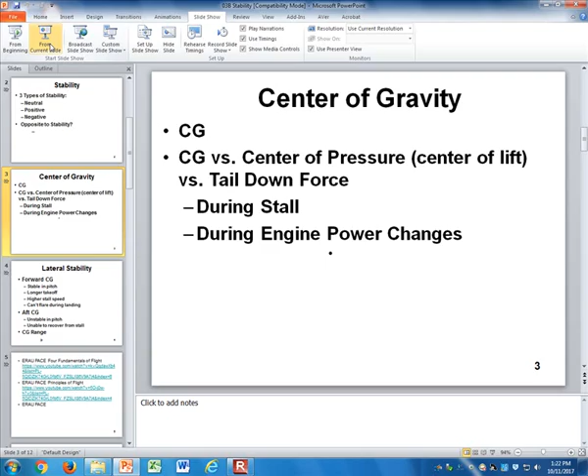So here we are. It's October, what are we now, October 11th?

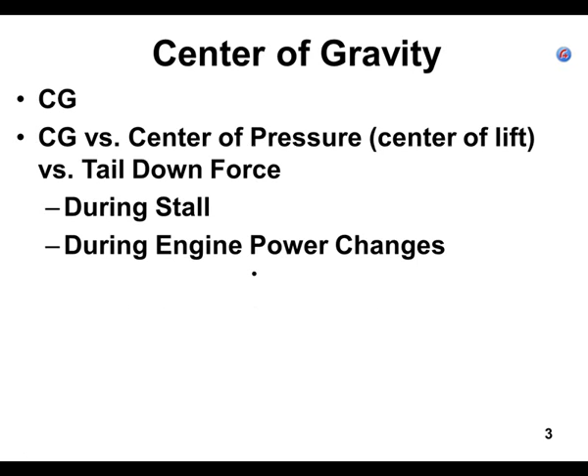We're in section 03B, stability. The last slide we were looking at was this one right here, where we talked about center of gravity versus center of pressure versus tail down force during engine power changes. Now I'm going to talk about lateral stability.

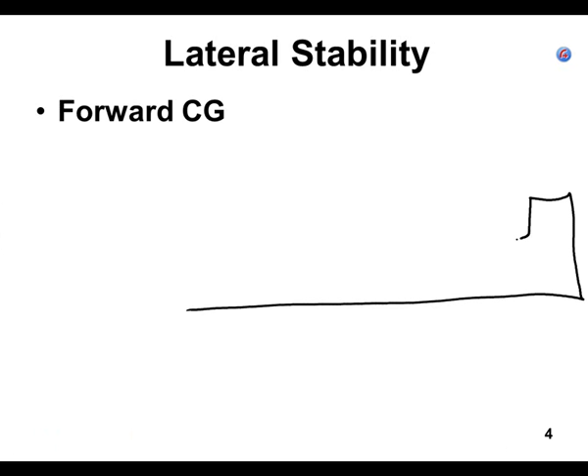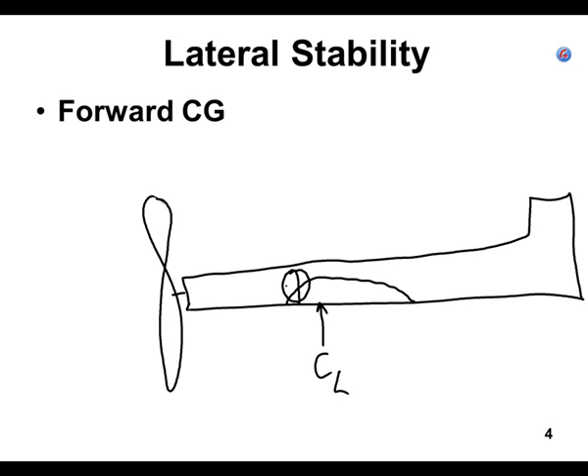What if you have a center of gravity that's way forward? For fun, let's ask what that means. Here's our airplane, and let's put our airfoil on it. Here's our center of lift, which is the same as the center of pressure, and just in front of that is our center of gravity. So there's our CG. The question is, what if the center of gravity is farther forward than normal?

I brought my questions today, so think about this problem. You're flying along at a certain altitude above ground level. In the central San Joaquin Valley, you're probably at about 20 feet MSL on the altimeter. You have it trimmed for straight and level flight.

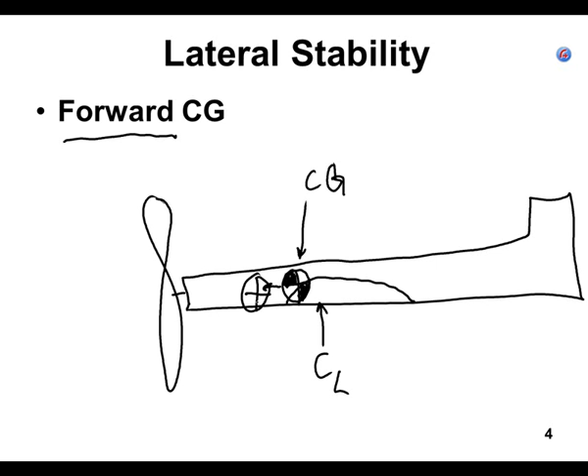All right, so you pick up your 20-pound boom box, lift it up, and sit it on the instrument panel in front of you, turn it on and turn up the radio. You moved the center of gravity of this airplane farther forward compared to where it was. I could have said you got in the back of the baggage compartment behind the seat and grabbed a 20-pound lead weight and stuck it up on the instrument panel. In either case, the average weight of the airplane moved forward from where it was. So in this case, we're essentially saying that we moved the center of gravity over to here, because if here's the cabin and here's this 20-pound boom box, we moved the boom box over to here. So our center of gravity moved forward, or shifted forward.

So now the airplane has a center of gravity. Remember, the condition of the airplane, it was trimmed. We were eating our ham sandwich, so we take a bite and we're chewing on it. We grab our boom box, stick it out in front of us, and turn it on.

We start rocking out. Well, actually, I'm thinking Kool and the Gang would be pretty awesome. Does anybody know who Kool and the Gang is? This is before they turned the phrase hip hop. It was like rhythm and blues, maybe kind of disco-y. All right, you don't know who Kool and the Gang is. Fine, see if I care.

So if you move the center of gravity forward and you don't touch any of the controls because you're all trimmed out, think about it. Don't say it out loud until I call your name. What's going to happen to the pitch of the airplane? You get three choices: the pitch stays the same, the nose pitches down a little tiny bit, or the nose pitches up a little tiny bit. It's down, that's right. So what do you think happened to the airspeed, Mauricio, if the nose pitches down and you don't touch anything?

You've got three choices: it'll go faster, it'll go slower, or it'll stay the same. How about you, Jordan? What do you think is going to happen to the airspeed? Yeah, the airspeed's going to increase.

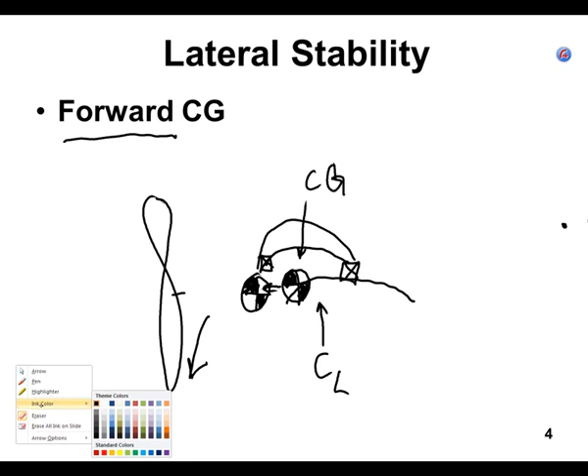Let's see if I can fix it. There we go, a little shorter airplane. So here's our elevator at the top of the airplane, at the top of the tail. And then we have this elevator.

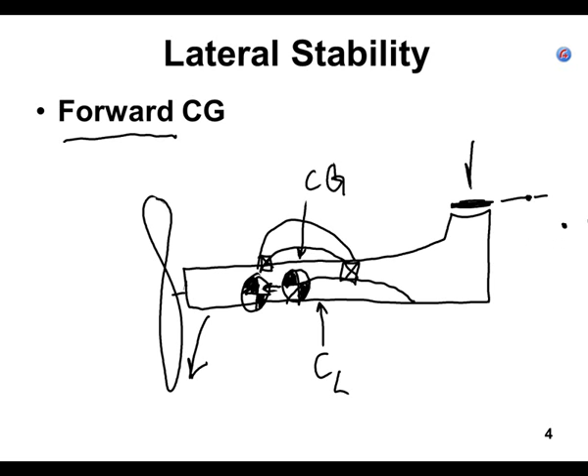But on the elevator is also the trim tab. So here is the horizontal stabilizer, which I'll call the horizontal stab. And then here is, and it pivots, here is the elevator. And then here is the trim tab.

We've looked at them before, and maybe that's what we'll do the last 2 minutes of class, go out and look at a trim tab. But when you move that trim wheel in the airplane, or in your case, the simulator, all you're doing is moving the trim tab to push the elevator to where you want.

So in this case, if the nose went forward, you would want the elevator to go up a little bit. So you would actually move the trim to go down like that, so that the air would hit the trim tab and push the elevator up. So yay, that worked out great.

What if you secretly stowed a human being in the back that weighed 100 pounds and you tried to put that on top of the instrument panel? It would push the nose down even more. Well, here comes the fun part. What happens when you go far forward that you run out of trim, and now you're even pulling on the control wheel, and even though you pull it all the way back, it's still going down?

Well, how much fun is this going to be when you're trying to land? It's fun as you're going towards the airport. Pull the airplane off, and you need to pull the nose up a little bit and flare, so you're going to be a little bit unhappy.

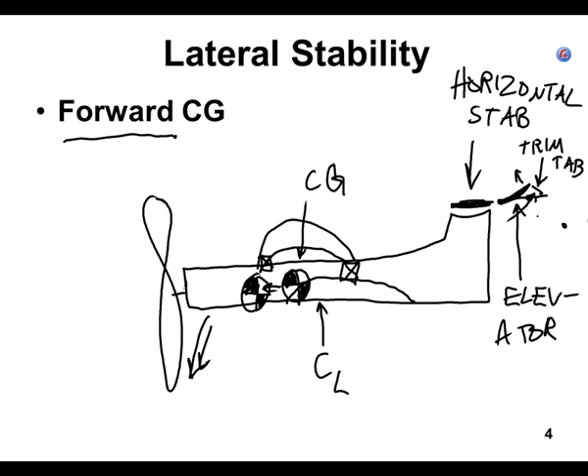So one of the biggest things about having a center of gravity that's too far forward is that you're not going to be happy when you come in and land. The three minor things about having a forward CG is that, one, it makes it stable. The airplane won't change the pitching up and down as easily compared to if the center of gravity was aft. So the airplane's a little more stable, and it'll hold altitude a little bit easier while you're eating your ham sandwich.

However, it will take a little bit longer takeoff roll, and the airplane will stall at a slightly higher speed, but 2, 3, 4 knots, you're probably not going to notice that. If your airplane will get off the ground in 800 feet and you have a 3,000 foot long runway, that extra 800 to 1,000 feet, you're not even going to notice that either, or that it's more stable in pitch.

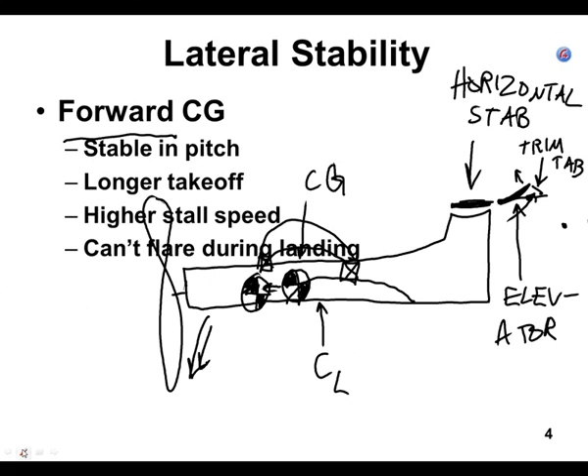Well, the thing is, though, and this is the important one, is that if your forward CG is too far forward, then you won't be able to flare the airplane during landing. You might be able to level it off, but what happens to the effectiveness of the elevator when you're flying slower and slower and you're coming into land?

Instead of doing 90 knots, you're doing 70 knots. You put all the flaps in, and now you're actually landing, and the airplane slows down to 60 knots. What happens to how well that elevator works?

Alex isn't here. Jordan, man, it's your day again. That's awesome.

If there's less air blowing across the elevator, does it work? If you normally expect the elevator to make the nose go up, but now you're flying slower, does it still work the same way?

It doesn't. That's correct. So when you're coming in to land, if you end up pulling the control wheel all the way back, you might just end up plowing straight into the runway and damaging the airplane. So that's why we don't like a center of gravity that's too far forward. Of all these things, this is definitely the most important problem with having a forward CG if it gets too far forward.

All right, so now let's talk about an aft CG. Aft is like the CG moving to the back of the airplane. Forward is in the front, and aft means it moves towards the back. Has anybody ever sailed on a ship? Is the back the aft, or is that the stern? All right, let's not worry about it too much.

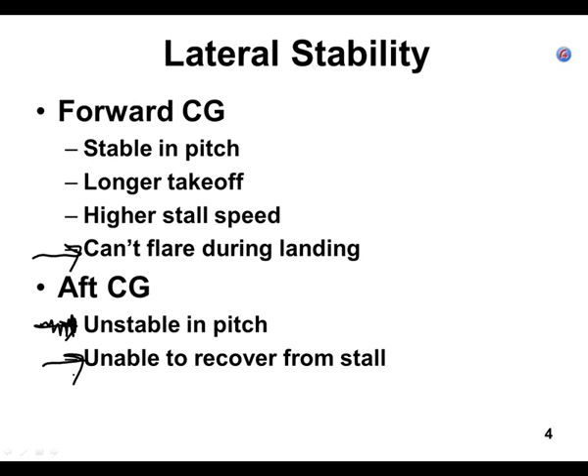So an aft CG, to me, this is my personal opinion, is worse than a forward CG, because a little bit of instability in pitch means I'm going to have to, when I'm eating my ham sandwich, keep one hand on the control wheel to push it and pull it, because it's less stable in pitch. But what I'm really going to be unhappy about is if the nose goes up too high. If I can't push it back down, I'm going to stall and I might die. So this is the most important one here - the aft CG is by far the most important problem if the center of gravity is too far back.

So literally what's going to happen - thank goodness we're pilots, and we like to add, subtract, multiply, and divide if we have a calculator in front of us. But other than that, here's our center of pressure at 1/3 past the leading edge. And we'll just say that this is where the center of gravity is most of the time. But we need to be able to put at least 2 or 3 boom boxes back there, right? Don't we want to be able to do that?

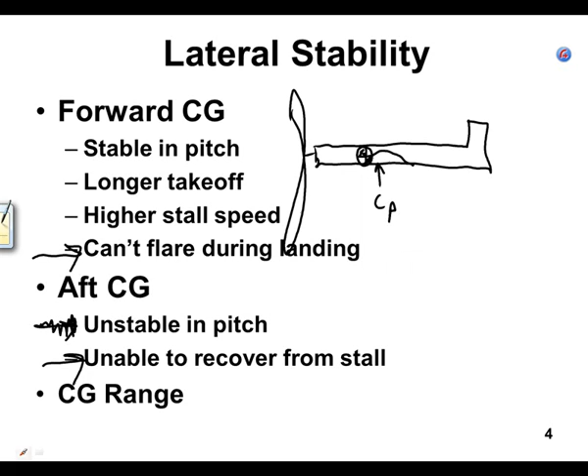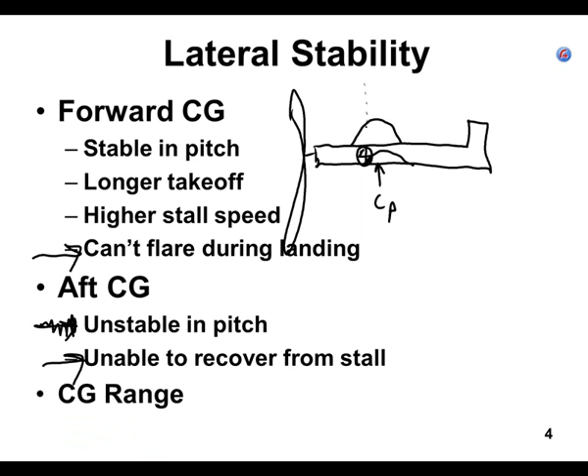Now, granted, we're probably not going to put them up front by the dashboard very often, but it would be really nice - say here's our bubble that we're sitting in. It'd be nice if this is where the center of gravity normally is, it'd be kind of nice if the center of gravity could be a little bit aft of that, and it'd be kind of nice if the center of gravity could be a little farther forward of that. Why is that doing that? Okay, so effectively, what that means is this area right in here is going to be the CG range.

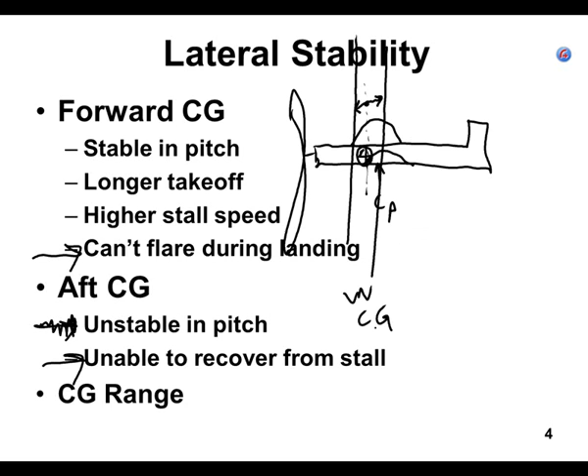Maybe a better way to say it is allowable. For every airplane, there's a center of gravity range you can load the airplane towards, so it's a little bit nose heavy, and the flight controls will still work well enough. You'll still be able to flare the airplane and do everything you need to. You could also load the airplane with an aft center of gravity so the tail is a little bit heavy.

But you're still going to be able to push forward on the control wheel and make the airplane go down in case you have a stall or whatever maneuver you need to do. The good news is there are engineers that figure this out in advance, and somebody at the manufacturing company goes and flies it to make sure it works correctly. All that calculation goes into a chart in the pilot operating handbook. So the center of gravity range allowable is in the pilot operating handbook, and you have to follow it as the pilot in command, even as a private pilot.

That's something you're going to do when you start flying an airplane you've never flown before. You're going to say, okay, here's where the fuel goes, here's where the people go, here's where my cargo goes. In this case, the cargo is a bunch of 1987 boom boxes. You'll see it's just tables. There's some math, but it's add, subtract, multiply, and divide with a calculator. Don't worry, later in the semester we're going to practice doing it. It's not difficult, you just need to do it 2, 3, 4 times, and then you'll know how to do it.

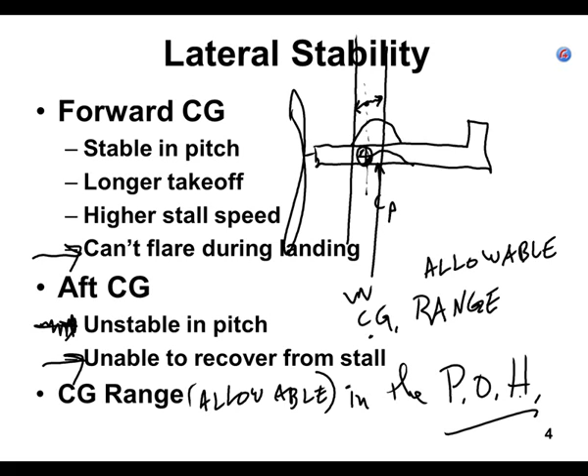All right, I think I'm going to come back to that.

Next, I want to talk about some stalls in particular. There's effectively 4 ways to exceed the critical angle of attack on a wing. Remember, that's from a previous day, on a previous slide. What is a stall? A stall is when the critical angle of attack on the wing is exceeded, or you go to greater than the critical angle of attack. Because according to the FAA, when does the wing stall? Whenever you exceed the critical angle of attack.

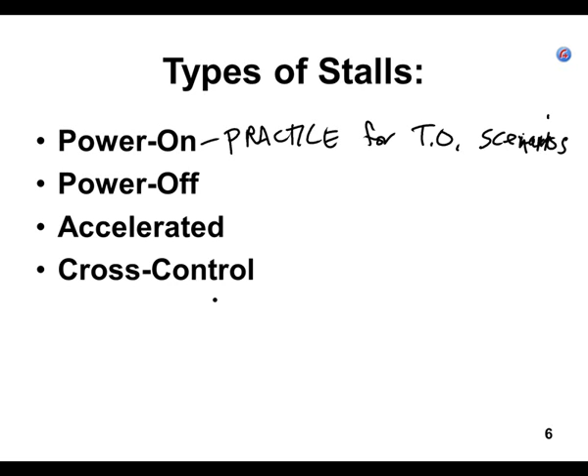But in the airplane, you can be doing different things. I mentioned it the other day, power on stalls. You're going to practice this for takeoff scenarios, so you're going to pretend you're in the takeoff configuration. Typically takeoff configuration means 2 things: it's going to be full engine power, and the flaps are going to be up or retracted.

I'm not going to worry about the landing gear. Training airplanes, you're not going to have the landing gear going up. You don't have to write this down, but if it was in an airplane that had retractable landing gear, you'd put the landing gear up.

Power off stalls, you practice those for approach to landing. That's going to be low or idle power, and you're going to have flaps extended. That's what you would be if you're coming in to land.

Let's say, for instance, you're 300 or 400 feet off the ground. You've turned from base leg to final. You're looking straight at the runway, you're 300 feet off the ground. Usually by that point, you've got all the flaps extended, and the power setting is either at idle or close to idle.

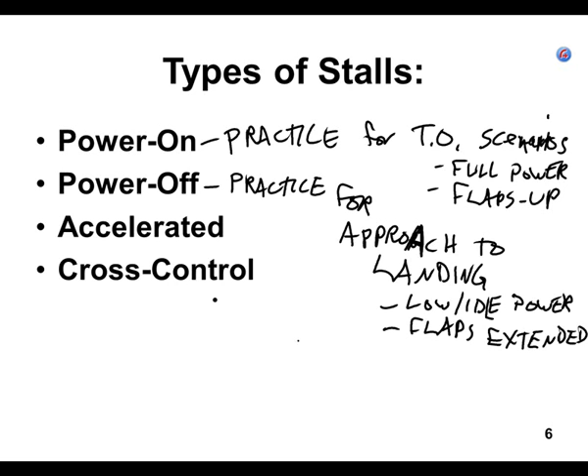You're not going to recover in time to avoid hitting the ground, power lines, or whatever it is. So that's one reason you're going to practice those stalls. You're also going to practice an accelerated stall. An accelerated stall happens at high wing loading. Effectively, that means...

Steep turns—well, let's just say turns. Now granted, maybe when you're doing a 30-degree bank turn, you only need 110% of your lift on the wings—100% to keep the airplane up and 10% to make your turn. But it's going to be easier to hit the critical angle of attack because you're already trying to maintain altitude. You're already at a slightly higher angle of attack.

I know it'll be difficult to answer this question, so I'll probably give you the answer: what kind of bank angle do you use flying in the traffic pattern in light airplanes? How much do you roll the airplane? It's not a law, but that's what people practice at, and it works out really well. So you bank the airplane to 30 degrees of bank, and here's where people screw up.

In particular, this accelerated cross control stall—the place people usually do it is in the traffic pattern at less than 1,000 feet. That last turn, or the second to last turn to final approach, you're under 1,000 feet and turning at 30 degrees, and you make a mistake and pull back too much on the control wheel, and you stall the airplane. Just to be really clear, I'm not trying to scare you. I'm telling you this because you're going to have to practice it to get your pilot certificate. You're going to have to demonstrate it on your check ride, on your driving test. And the more you know as a pilot, the safer you're going to be.

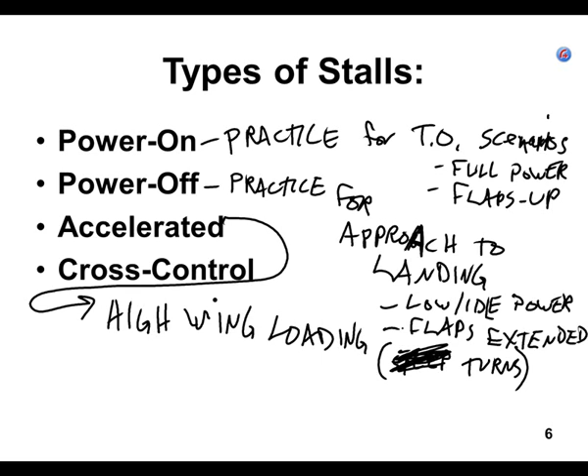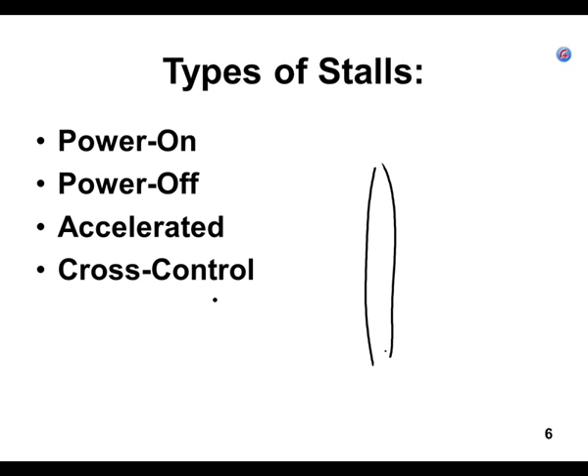And then the last one, a cross-control stall, is I think the most interesting one of these three. Let's look at an airplane when you go to make this turn. There are two flight controls you operate: the ailerons and the rudder. The ailerons do most of the turning, but if you don't also give it rudder, the turn isn't very good.

If you look at your six basic instruments, your six-pack, this one right here has a little glass tube with a little black ball inside. You may recall from one of the simulator lessons that ball needs to stay centered, and the way you do that is you, quote, step on the ball with your rudder pedals. So if the ball's sticking out to the right, you step on it with your right foot because you don't have enough right rudder.

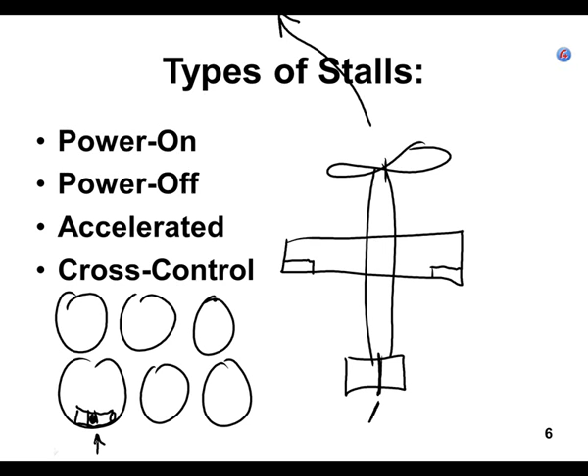So if you turn to the left, you give it aileron, but you also give it rudder in the same direction. If you're giving it the wrong amount of rudder, and that ball is way off to the side, here's what happens when you stall. Let's say for fun that you're in a left turn, and we don't give it any rudder. We'll make it even worse: we'll say that we're giving it right rudder.

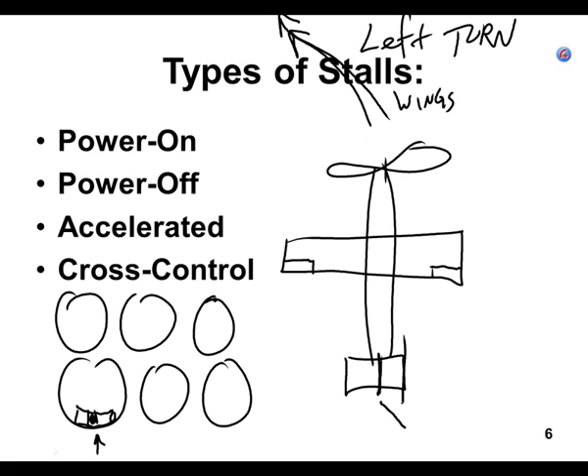That means the wings are going to try to make the airplane go to the left, but with the air hitting the rudder and bouncing off, it's going to push the tail to the left, and the nose, our yaw, is going to go to the right.

So this is a cross-control stall: when this little ball in the turn and slip indicator is way over to one side, not in the center, and you're trying to turn in the other direction, and you pull the nose up too much, you're going to stall.

But something interesting is going to happen that hasn't before. If you're yawing the airplane to the right, this wing is going to be going a little bit faster, and this wing is going to be going a little bit slower.

So just for fun, think about this question before I call on who's going to answer it. If you had to pick and say which of these two wings is going to stall first, which one would it be? Jordan—I'm just kidding, it's Jared. I'm taking your name out for a couple of minutes, Jordan.

I don't understand why. Oh, it's because of those two bumps I put on it, and I feel it and go, oh yeah, that's the one. I'm just kidding.

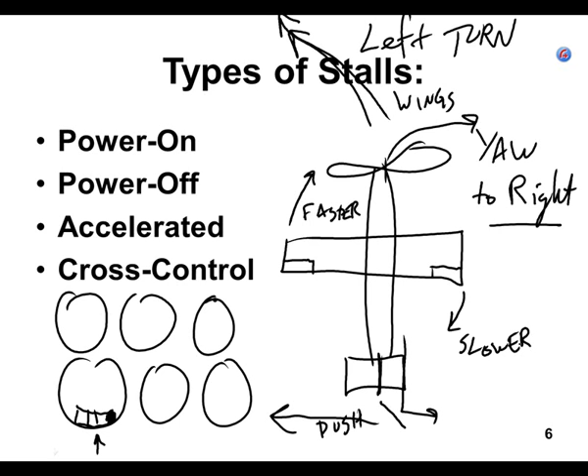All right, stall recognition. So I talked about stall recognition, I got ahead of myself. How do you tell that you're going to stall so you can prevent it? That's what we want to do. How do you drive down the road and not hit that 18-wheeler coming the other way? How do you get stall, or 18-wheeler head-on collision, recognition?

First, look at the middle, the double lines or dotted line, and make sure you're on the right-hand side, unless you're in a foreign country that drives on the wrong side of the road, then make sure you're on the left-hand side. Number 2, look out there and make sure the truck's not in your lane. So there are ways to recognize an imminent head-on collision.

So just for fun, what would you do if an 18-wheeler was coming along and you're in the right spot in your lane, but you look up and they're about 10 feet into your lane? What do you do? I would slam on the brakes. But what if that didn't seem to be doing enough? What else could you do? Get off the road, yeah, it's time for the shoulder.

I'd almost rather hit the shoulder than hit an 18-wheeler head-on. I'm not sure which one I'd like more. Either way, your car's going to stop. If I hit the corner of the 18-wheeler, I might spin around and it might take me an extra second to slow down, but I'm telling you, the shoulder of the road looks really, really good right now.

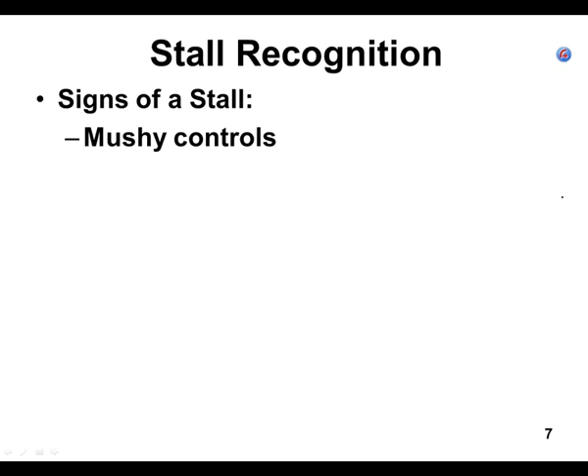So that's what mushy control is. This is really the same thing. You're going to feel mushy controls, and this relates to loss of control - L-O-S-S. That's not Los Angeles, it's loss, L-O-S-S.

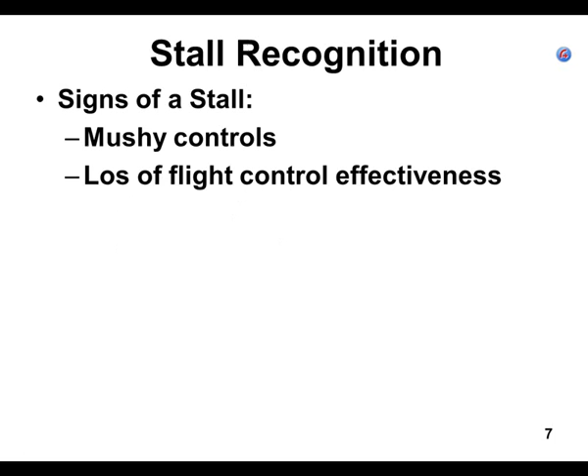The controls feel mushy because they don't have any impact. If you're in a fixed pitch propeller airplane, meaning the propeller doesn't change pitch, you're stuck in third gear, like you would be in a Piper Tomahawk or almost any airplane you're likely to take flying lessons in, since you normally train in one of the least expensive airplanes available.

The blade pitch is fixed, so the propeller is going to slow down. Think about this: if you're in a car that's stuck in third gear and you're going 60 miles an hour...

And you start holding the pedal, but you don't move your foot - you don't have cruise control on, but the pedal is pushed down halfway. You're going 60 miles an hour, and you start going up a hill, you're going to slow down.

What's going to happen to engine RPM? Engine RPM is going to go down too. It's the same thing in a fixed pitch propeller - if you slow down by pulling the nose up and going slower, the engine RPMs get lower, and the engine makes less noise and a little less vibration.

And like I talked about earlier, there's going to be less wind noise going across the airplane. Invariably, if you're renting an airplane that's 20 years old - and let's put it this way, airplanes you train and fly are inexpensive - they don't seal that well against outside wind. So the seals, even brand new out of the factory, don't seal nearly as well as a brand new car.

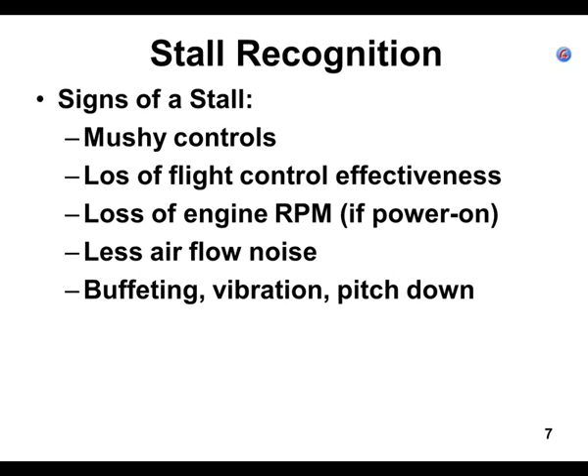Generally speaking, the instructor is going to say, let's go all the way up to a stall, recognize it, and recover before it stalls. But on your check ride, the examiner is going to say, let's do a full-blown stall, and then recover. Because you really need those two skill sets: how do I recognize it and not let it happen, and how do I recognize it, how does it happen, and then what do I do about it?

So there's the stall recovery. You're going to reduce the angle of attack on the wing, which generally means pushing forward on the control wheel. If the engine isn't already at full power, you'll smoothly advance the throttle all the way to full power, because you want to practice as if you're in the worst case scenario. Where's the worst place in a little airplane, or a big airplane for that matter, to stall the wing?

When you're turning, yeah, when you're turning at 20,000 feet. What? You're landing or you're taking off. I would have said low to the ground, but those are the two circumstances — you're going to be low to the ground.

So yes, let's practice the technique, if it happens, in the worst place possible for it to happen, and that's what we're going to try to recover from with the least amount of loss of altitude. Let's recover with 200 feet of altitude and not lose 400 feet. So you apply full power, and by this time, if you've reduced the pitch on the wings and added full power, you'll have broken the stall, the wing will be flying, and now you can pull the nose back up to a climbing airspeed — a normal climb, something like 70 knots.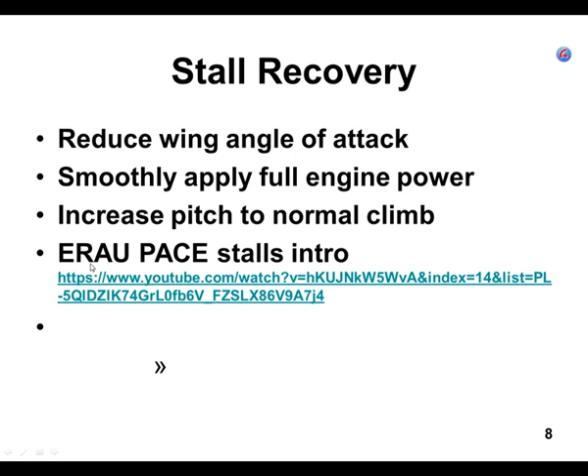So I want to watch this. Question, Jonathan?

No, stall recovery in helicopters doesn't exist — you just die. You never stall the rotor blades on a helicopter, lest ye shall surely die.

The blades will stall, and then they'll slow down, and there's no way to speed them back up. In an airplane, you can drop a couple hundred feet and get the wing flying. In a helicopter, though, you're not looking at airspeed, you're looking at the RPM of the rotor blades. The RPM gauge has a lower limit — thou shalt never go below that lower RPM, lest ye shall surely die. You can quote me on that.

Yeah, the blades. If that angle of attack goes too high and it stalls, the drag goes way up and the blades slow down. Even if you immediately go to zero pitch, you can't bring them back up to speed, because now you're falling and the angle is way too high. In a helicopter—

In helicopters they don't talk about stalling, they talk about blade stall, and that's related to rotor RPM. So in a helicopter, the most important thing you can ever look at is the rotor RPM gauge — that's why it's the biggest one, right smack in front of you. It's got a green arc and a lower red line. If you go past the upper red line, you damage the helicopter, you'll land, and they'll probably have to replace parts to the tune of tens of thousands of dollars, but you'll be alive. But if you go below... yeah. See, question?